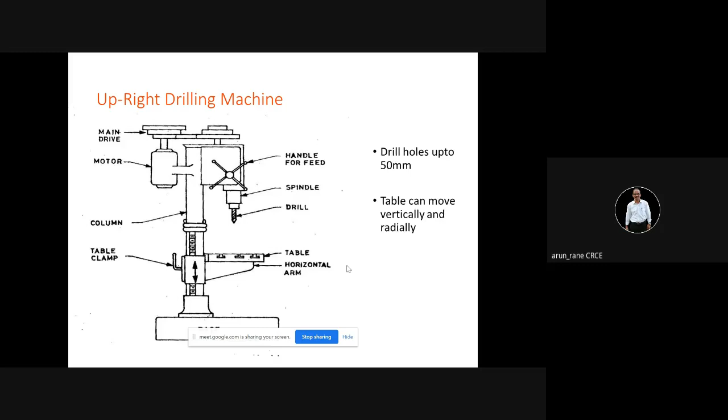Radial drilling. So whatever I am showing, these sketches are easy to draw. You have to practice this; in the examination you have to use these figures.

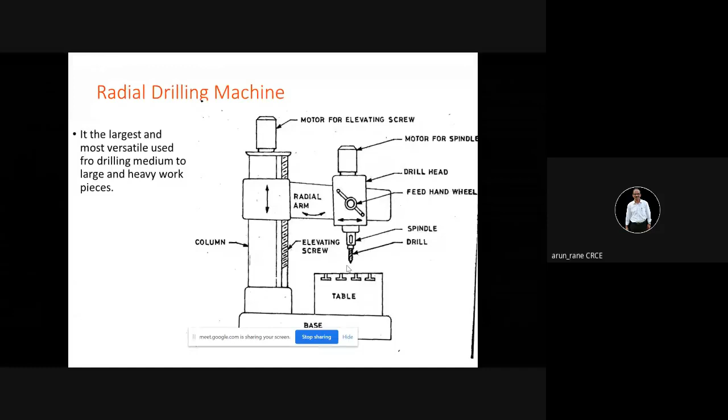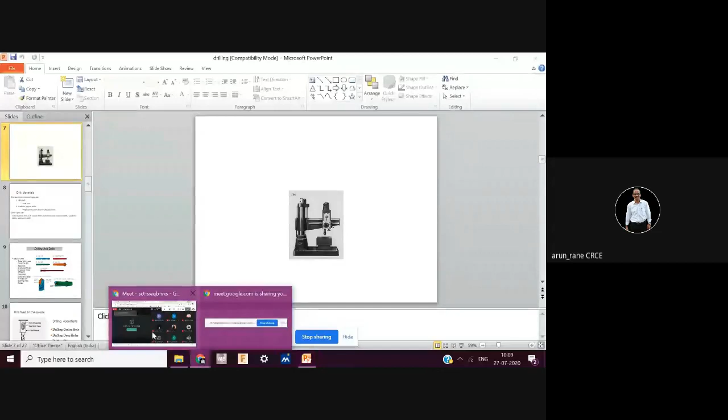More are joining. Hope nobody is waiting. Rutika has joined now. All right.

This is a photograph. This is a round column on which this slides up and down, and these are the guideways on which this head slides.

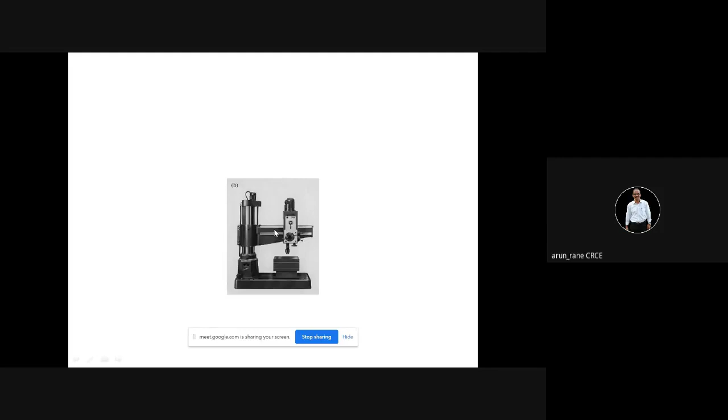Now drill material can be HSS, that is high speed steel, or it can be carbide tip. Carbide tip means the cutting points are coated with carbide, and the rest of the portion is HSS or MS. So this coating is done by PVD or by CVD. These are the methods to use the carbide coating. PVD stands for physical vapor deposition. CVD stands for chemical vapor deposition.

Coating can be of carbide, titanium carbide, tungsten carbide, or coating can be of nitride also. So these coatings offer a very high wear resistance as well as higher cutting speeds and higher cutting feeds, so that production is more with the help of this coated or carbide tip. When I say carbide tip, that means the entire insert is made up of carbide. The tip is made up of carbide.

And when I say coated, that means only a coating of 10 or 20 micron is given on the top, coating of carbide or coating of nitride. So that saves the cost. When it becomes blunt, then again you have to send it for the coating. You cannot do coating in-house, because that is a special technology, carbide and nitride coating. So you have solid carbide drills.

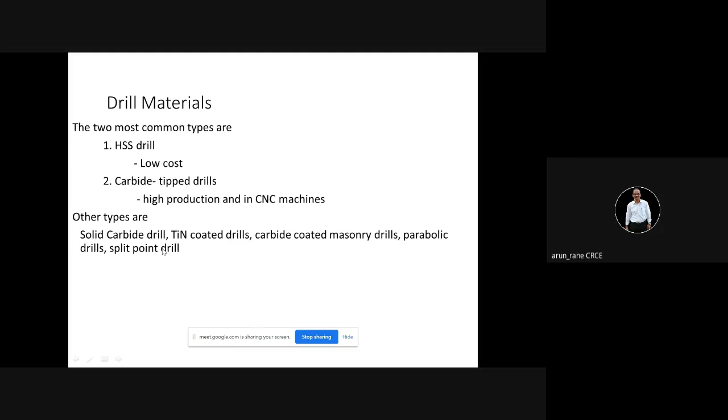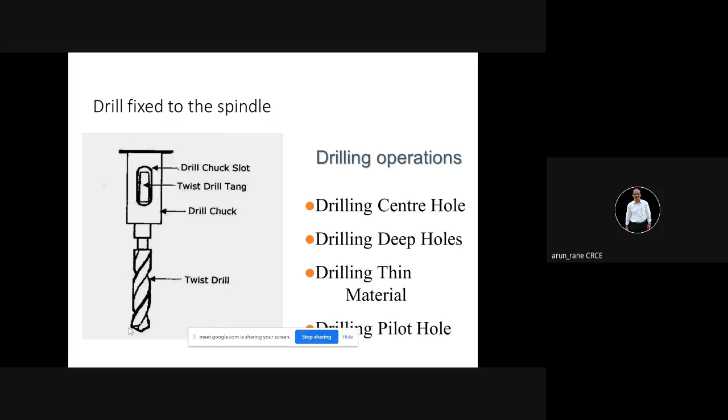Remember, if you are touching by hand, don't touch the drill with naked hands. Your hands will get cut because these are all cutting edges. They are very sharp. Always use gloves. This is the shank. This can be a parallel shank or it can be a taper shank. Generally up to 12 mm you get a parallel shank.

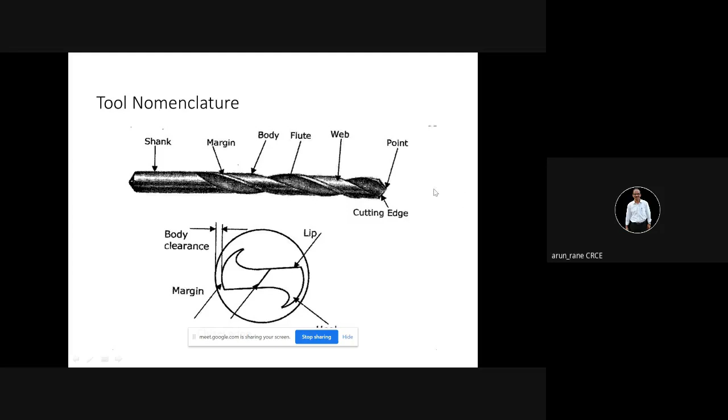Then how to hold? You know that a drill can be held directly in the chuck, or using a socket, or you can use a sleeve also, or directly in the spindle of the machine. If the drills are big, that is generally above 35 mm or above 40 mm, then they can be held directly inside the drilling machine spindle.

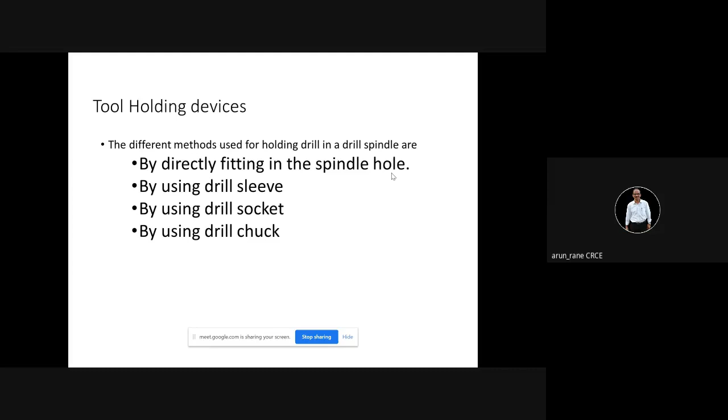So this is your drill chuck in which you can hold the drill. This is the sleeve. This sleeve goes inside this socket, and this socket goes inside the drilling machine spindle. And this is what I was telling you, the use of the drill drift. You have to push this. This has a taper. One side is straight, and the other side has a taper.

So when you push this inside, because of this taper, it will move the drill down. You have to apply just a little pressure so that the drill moves a little down. It doesn't fall down. And then withdraw this drift and simply remove the drill by hand. Again, safety first. So you must use gloves.

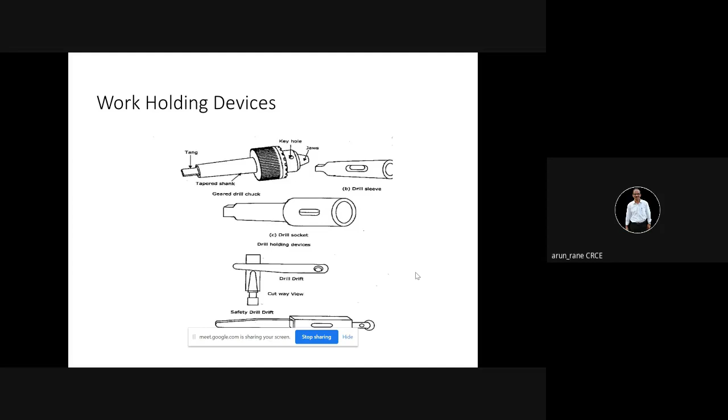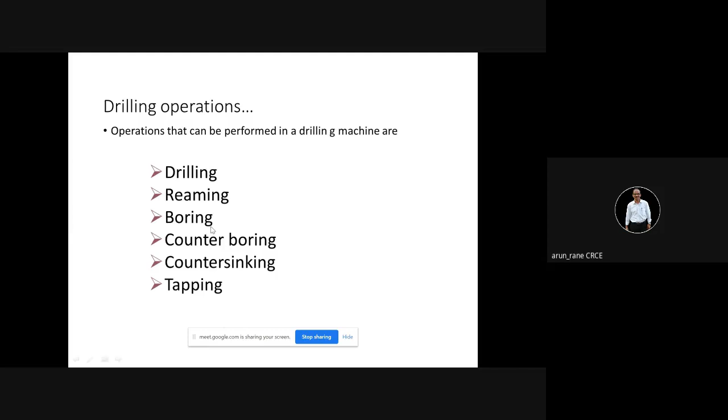These are the different operations, again important from an examination point of view. So you can do drilling, reaming, boring, counter boring, counter sinking, tapping. This figure is important. So as far as possible, try to draw the stages. This is your drilling, and this drilling is called blind drilling. Blind means it is not through and through. So you'll always get a point here.

So if something is going to rest, then you need to make this flat. This is what I was telling when we saw that step drilling operation. Then tapping, after drilling comes tapping. Tapping is nothing but internal threading. So either you can do hand tapping or you can do machine tapping.

Machine tapping is generally preferred when the size is M10 and above, because as the sizes become more and more, the force also increases. So manually it becomes difficult. So that's why we go for machine tapping.

Then this is your counter boring. As I told, this normal drill generates the point. So if you want to have a flat, then you have to go for counter boring. Why do we want flat? So that you can keep a washer or a flat bearing inside this. Otherwise, it will not rest properly.

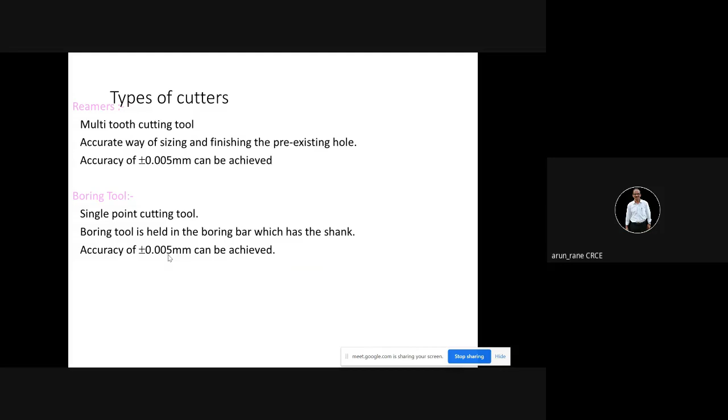Then you have countersink tools. You know the countersink operations, and that can be 60-degree, 82-degree, 90-degree. Standard countersunk cutters are available. Because if you have a countersunk, you can guide the subsequent tools like reamer or taps very easily. Not only this, there is another benefit: most of the times there are countersunk screws. We'll see in CAMD countersunk type of screws available in the market. So the head of the screw is countersunk. It's a taper, conical shape. So for such screws to be accommodated inside the hole, you need to have a countersunk on the hole.

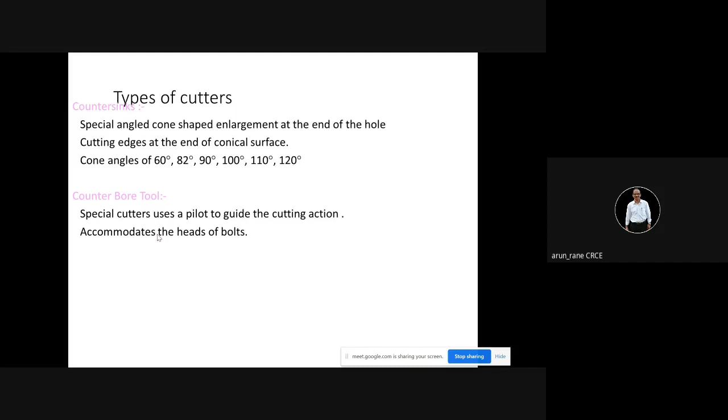Then counter boring is nothing but on the top portion we enlarge the hole. That is what is called the counter bore tool. This is countersink, and this is the counter bore. Spot facing means with the help of the counter boring tool, you are doing some kind of a facing operation here on the top. That is, on some particular spot you are doing facing operation with the help of the counter bore.

If it is a counter bore hole, we do counter boring down, we go down. But when it is spot facing, we just touch upon the face. We just clean up the face. Why? Because suppose the head of a hexagonal bolt is resting on this surface, and if this surface is rough, then the bolt will not sit properly. So you need to clean this surface a little so that the bolt head can sit properly and transmit the full force for which it is designed. If the surface is rough, the bolt will not sit right and the tightening will not be proper.

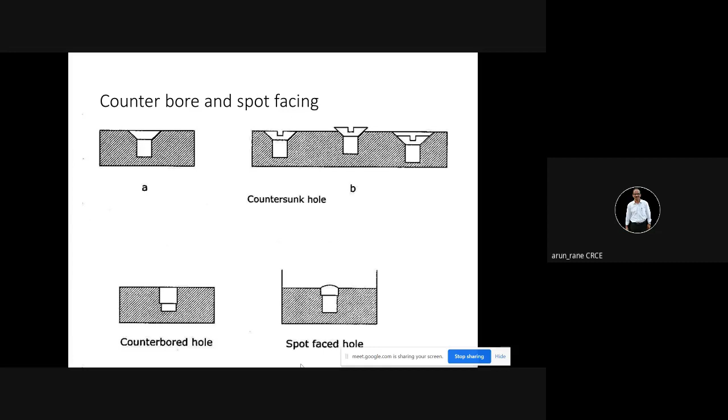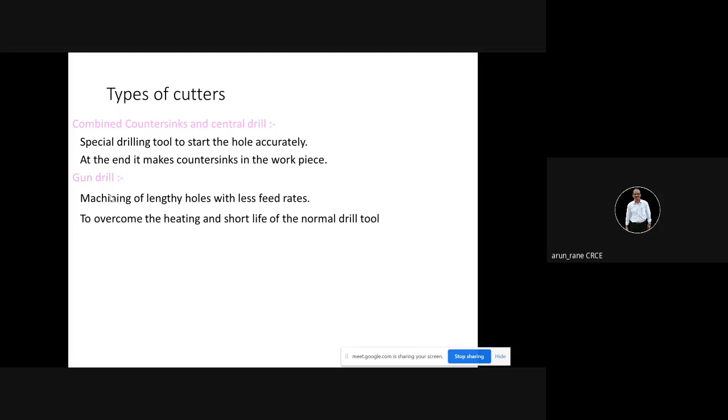You can have combined countersink and center drill, that is doing center drilling as well as countersinking at a time. So this saves time and it gives accuracy also. Only in this case the cutter design becomes a little complex. The cutter should have center drilling features as well as countersinking features. Gun drill, you know by this time, is used for longer holes, and don't worry because it is not there in the syllabus.

Tapping, you must have done. If you are doing manual tapping, then you have to use 3 taps, and if you are doing machine tapping, it's done by 1 tap only. Manual taps come in a set of 3: first tap, second tap, and third tap. How to identify these taps? The first tap will have a larger taper at the start, the second tap will have a little taper, and the third tap will not have any taper. The second tap is also called the intermediate tap, and the third tap is called the finishing tap.

The tap is held inside a device called the tap wrench. It's a kind of handle in which one side is fixed and another is movable. The tap has a square at the top. The tap wrench has a square hole in which the tap goes, and then you tighten with the moving handle, which moves in and out. So with the help of this, you can tighten the tap.

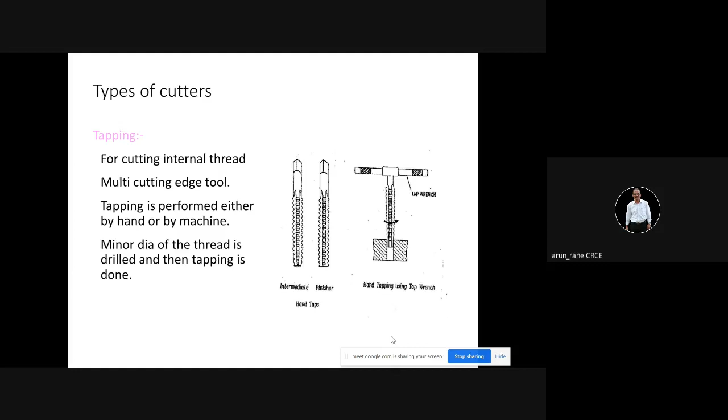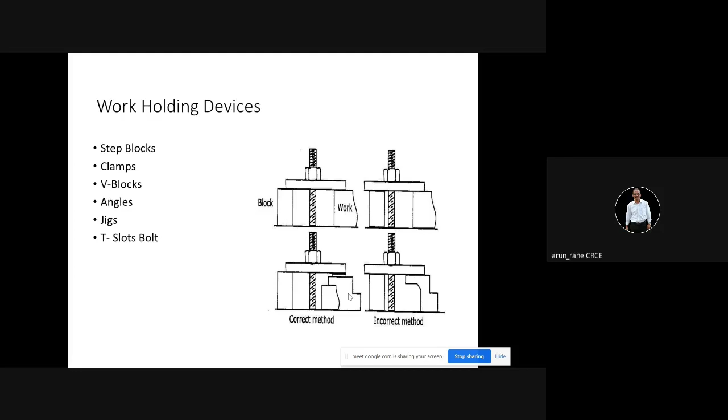So to ensure that this side and this side are at the same plane. Now, V is equal to pi DN upon 1000. This is applicable for any rotating tool. V is equal to pi DN upon 1000. Pi divided by 1000 because V is in meter per minute and diameter is in millimeter generally. So the left hand side is meter per minute, on the right hand side D is in millimeter, so that's why you have to divide by 1000. But the basic formula is V is equal to pi DN.

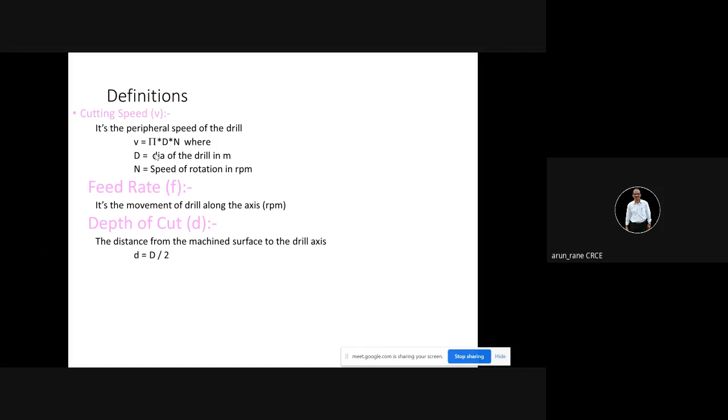How to find out the material removal rate in case of drilling? That is given by this: material removal rate is equal to pi D square upon 4 into feed rate into N, where D is the diameter of the drill, F is feed rate which is given in millimeter per revolution, and N is the revolutions per minute. But normally we don't ask numericals on material removal rate, we only ask numericals on machining time, because that is what is given in the syllabus.

So how to find out the machining time? You know by this time that you must have a total length to be machined. To be machined means to be drilled, to be turned, or to be milled. So you should have that total length, and the total length is in millimeter. Then you divide by feed rate. So L divided by F. Now F is in millimeter per minute. So millimeter divided by millimeter per minute, so you will get minute.

Now in this formula, L upon F into N, here F is in millimeter per revolution. So that's why we have to multiply by N. This is in the denominator, remember. So this is millimeter per revolution and this is revolution per minute. So revolutions cancel and you will get millimeter per minute. So the time will be in minute.

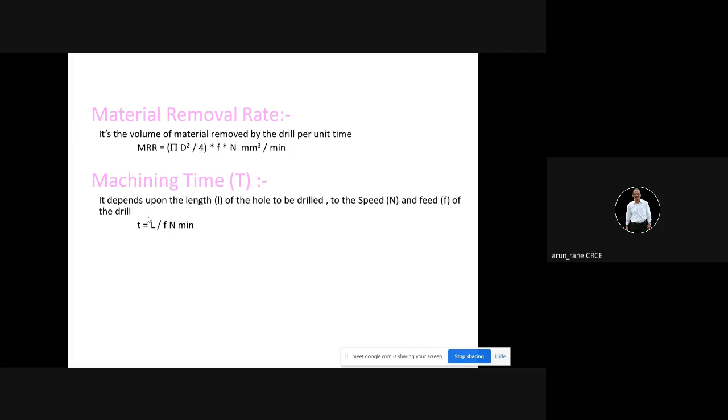Lubrication is important everywhere. With machines, most of the problems or difficulties come because the machines are not being operated properly. We don't know the operations of the machines properly. Almost 95% of the maintenance arises because of improper cleaning, no lubrication, no preventive maintenance done. You have to clean the machines after use. After use means at the end of the shift. Then lubrication is important. Then also greasing.

Use a brush. Don't remove the chips by hand. Chips are hot and sharp, so that will cut your hand. Not only machines, but T-slots, grooves, spindles, sleeves, belts, pulleys should be cleaned. And once at the end of the shift, you have to oil the important parts of the machine, like guideways, which are exposed to the atmosphere, so that they don't get rusted.

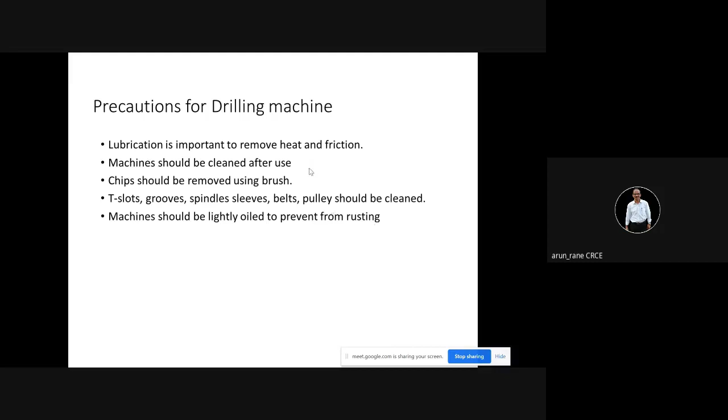If the machine is not in operation for 2 or 3 days or more, then it's better that you apply a thin layer of grease. Otherwise the atmospheric oxygen will react with the surfaces, it will corrode the surfaces, and then the accuracy of the machine will be reduced. So this is a kind of preventive maintenance which is applicable not only for the drilling machine but for other machines also.

Safety precautions. If you are asked what are the safety precautions to be followed, again and again I am telling: do not support the workpiece or tool by hand. There are many people who simply hold a workpiece by hand and do the drilling, too lazy to hold it in a vise. So even if it is a small piece, I suggest you use a vise or proper clamping device, because an accident happens once only. Then use a brush to clean the chips. Don't clean the chips with the help of gloves either.

Don't be overconfident, thinking you've put on gloves so nothing will happen. Chips may cut the gloves also and can damage your hand. When the machine is working, do not do any adjustment. Stop the machine and do the adjustment, that is belt adjustment, belt tension, belt shifting. See that your drill is rotating true, that is straight, before starting the operation. Never place tools on the drilling table. Why? Because the tools can damage the table. Tools can fall down also.

Avoid loose clothing and protect the eyes. Loose clothing because if the clothes or shirts are loose, they may get tangled in the workpiece or rotating parts. Accidents have happened. Not only loose clothing but even loose hair, long hair. Especially girls should take care, so you have to tie your hair properly. This is actually a major concern. There are many accidents because of loose or long hair. Protect the eyes. Why? Because the chips may be small and they may fly off and damage your eyes. So in the safety context, you need to use goggles.

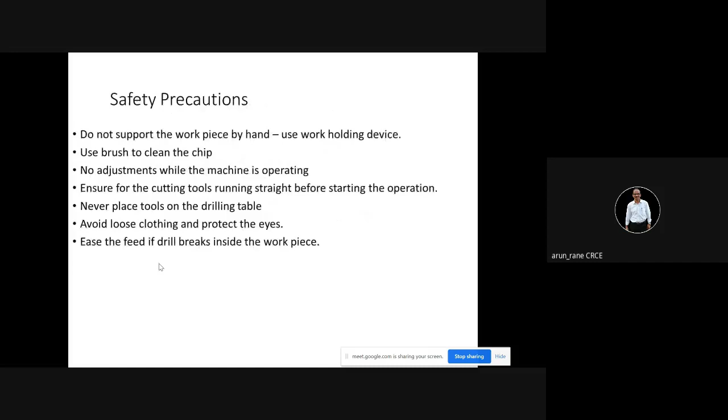So these precautions you have to take. These are the safety precautions. If you have any doubt, you can stop me and ask.

Now we'll go for milling operations. We have completed introduction to the manufacturing process, then some introduction to generating and forming processes. That is module one. Then we have completed the lathe. We completed drilling. Now we'll go for milling, which is again an important operation.

Since these are very important operations, I am giving some more time. I am overshooting the number of hours. Not going exactly as per the hours, but I am going as per the depth of the topic. Lathe being important, milling also being important, I am giving more time because these are the machine tools that you will always come across when you go to the industry.

I'll show you some operations here. What operations can be done on the milling. CNC I will not show you now. I'll show you the Emco milling machine. This is the DRO. This is vertical milling machine.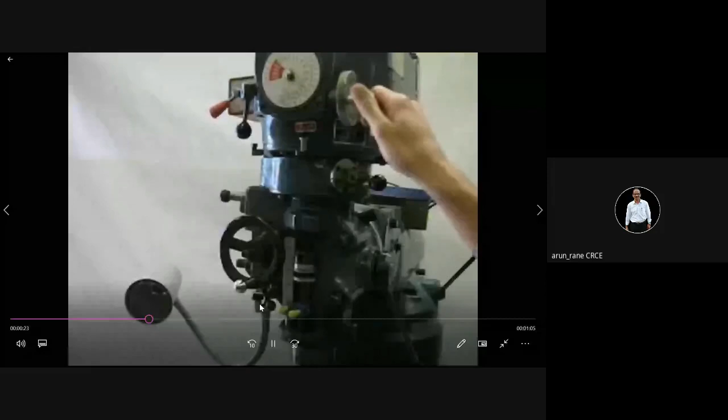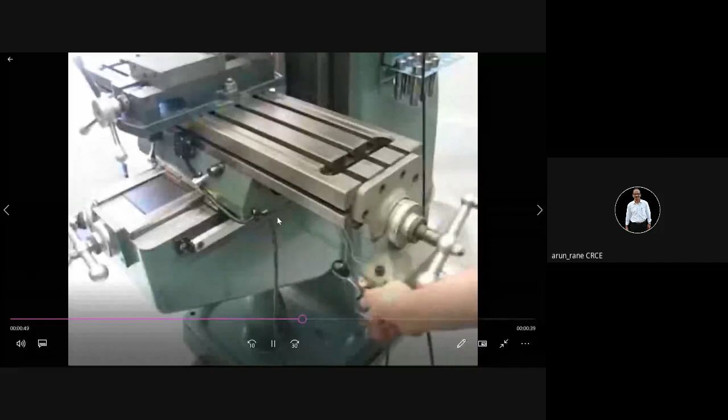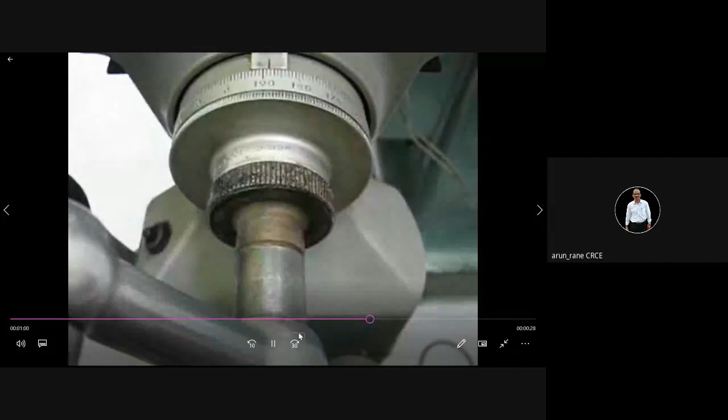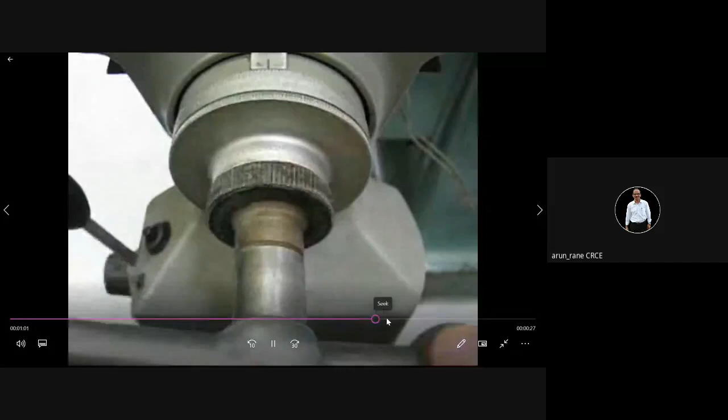This handle is for the table movement. Here he has engaged automatic feed. This is for the rapid feed, that is, the feed is fast. Generally, we call this the x-axis. This is auto feed. This is your y-axis, and vertical is your z-axis. So all the three axes can be moved in auto.

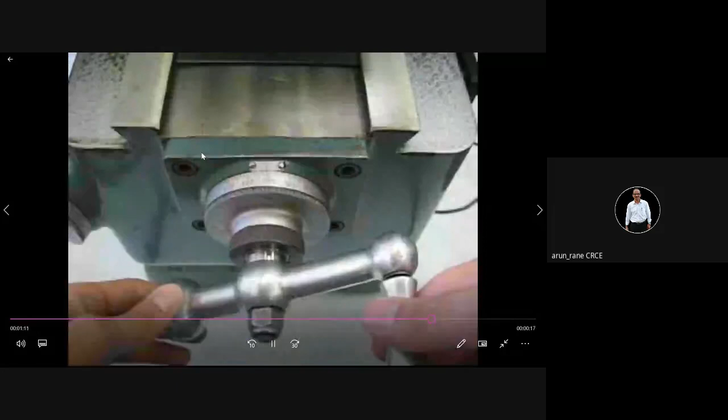These are the guideways on which it slides. This is a dial which gives a reading, and this is a DRO, that is digital readout. This is how the machine will look like. This is up and down vertical milling. This is X, and this is Y. This is a motor for changing the speeds as well as the feeds. This is the column on which these tables are mounted.

There is a provision that this entire knee, this is called the knee, can move up and down on this slide, and there is a screw here. This is the screw on which this knee is mounted, and the knee can be moved up and down. This becomes the Z axis here, and this spindle is for the tool movement. So this is also a Z axis. But whichever is longer, we will take that.

Now, since here the workpiece is moving like this and like this, the workpiece cannot be heavy. You cannot mount heavy workpieces. If the workpieces are heavy, then it has to be a fixed bed type, meaning the workpiece should not move. So generally, these kinds of machines are designed for up to 200 kg of workpiece, not more than 200 kg.

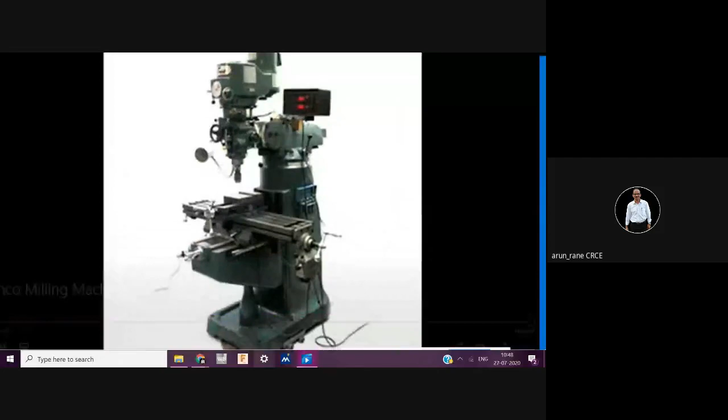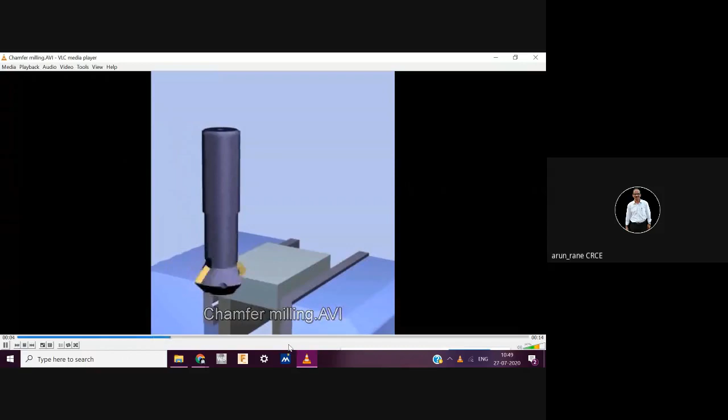What are the different operations that can be carried out? For CNC, I have some good videos that I'll show later. So what are the different operations which can be done on milling? These are all different operations. You can do V milling, V slot milling, slitting on vertical milling, radius milling, and so on. Alright, let us see one by one. This is chamfer milling. This is a vise in which the workpiece is held. What I'm showing is vertical milling operations.

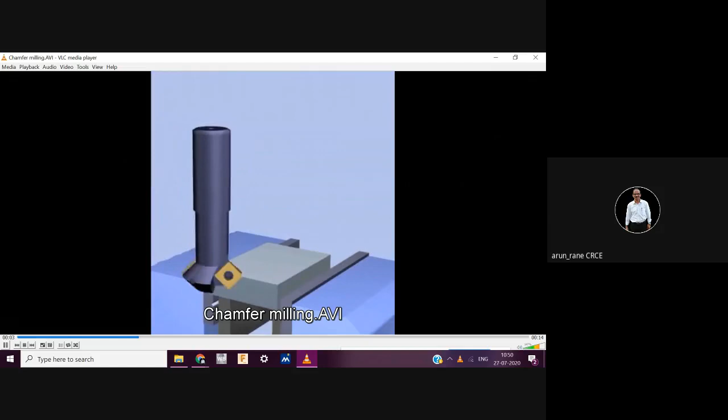This particular operation is chamfer milling, that is milling of the chamfer. Look at the inserts which are at 45 degree. This is what a typical cutter will look like. These are your inserts, and this is a screw which is used for clamping the insert. And this cutter is held in the spindle.

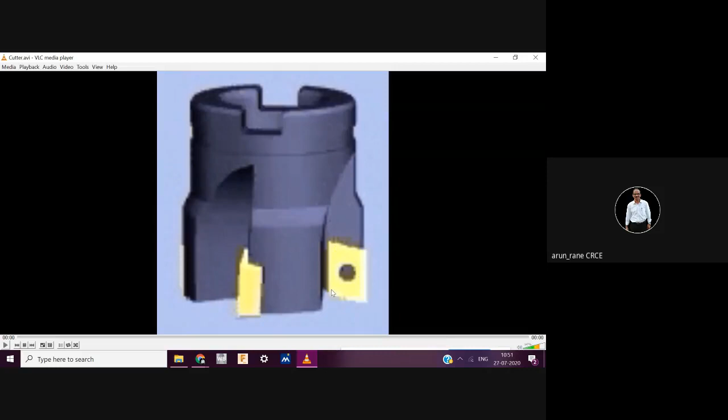Now this insert has 4 cutting edges: one, two, three, four. So if this gets blunt, then you have to index. And if all the 4 cutting edges get blunt, then you have to turn it upside down. So that means one particular square insert can be used almost 8 times.

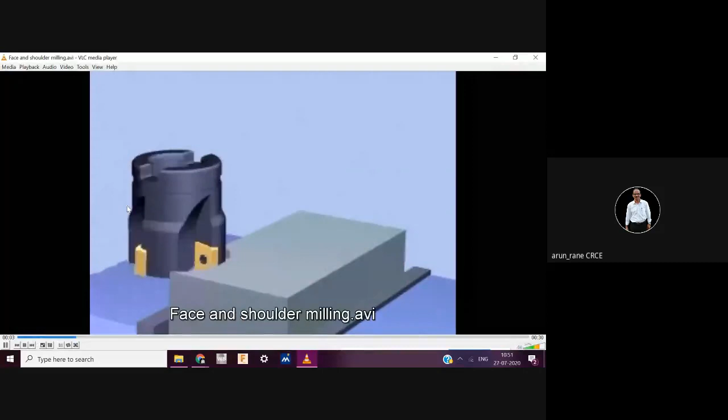So this is called face milling and shoulder milling. The meaning of shoulder is this. This portion is called the shoulder. This is your shoulder, and this is called the face. So face and shoulder milling.

So with the help of this cutter, you can get exact 90 degrees. Look at this cutting edge. See, this is exactly at 90 degree to the horizontal plane. So you get a pakka 90-degree face or a shoulder here. We call this face and shoulder milling, and there are 4 inserts.

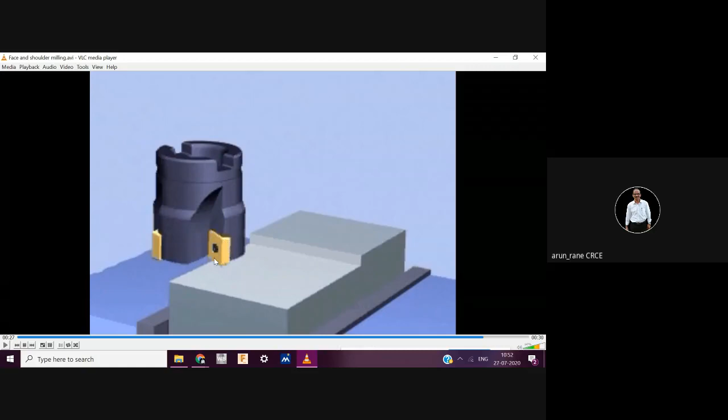So in case of milling, in one of the numericals I told you, the feed rate is given as millimeter per tooth per revolution. So if the feed is 0.1 millimeter per tooth per revolution, and if there are 4 teeth, then total feed rate will be 0.1 into 4, so that will be 0.4 millimeter per revolution.

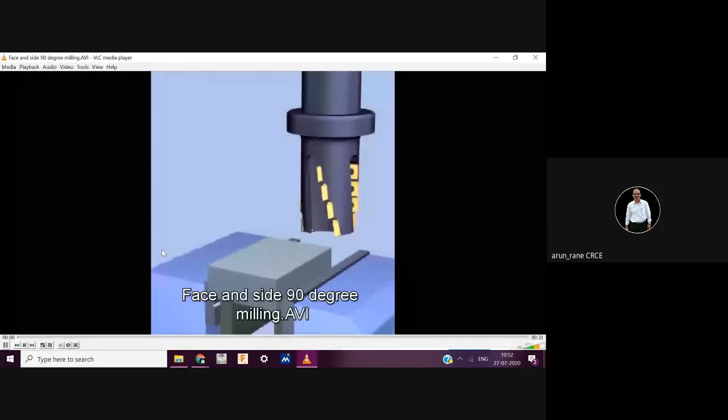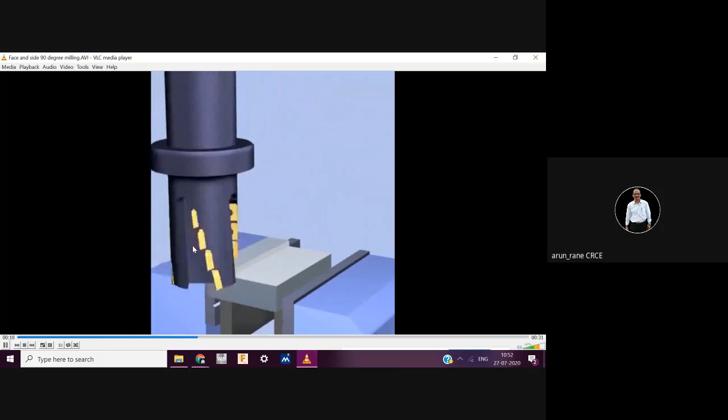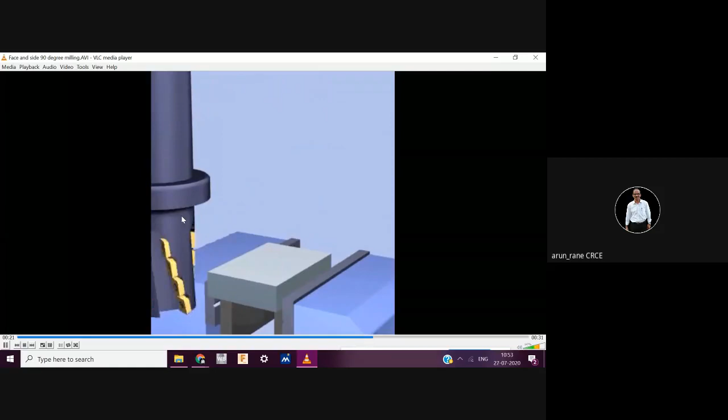Again, this is also face and shoulder milling. This has a longer height, so the shoulder heights can be more. But generally, we don't use it for shoulder, we use it for the face. This also is considered as a face, and this also is considered as a face. Alright.

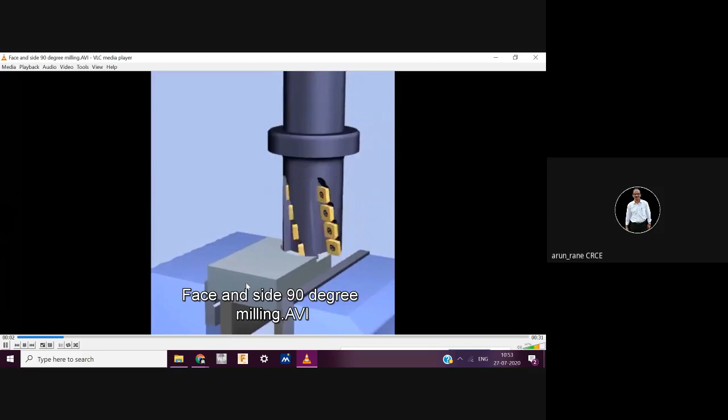So both the faces are milled here at 90 degrees. This cannot be called a shoulder. Shoulder means it's a kind of a step. So this we call only a face. Two faces are milled at 90 degree to each other.

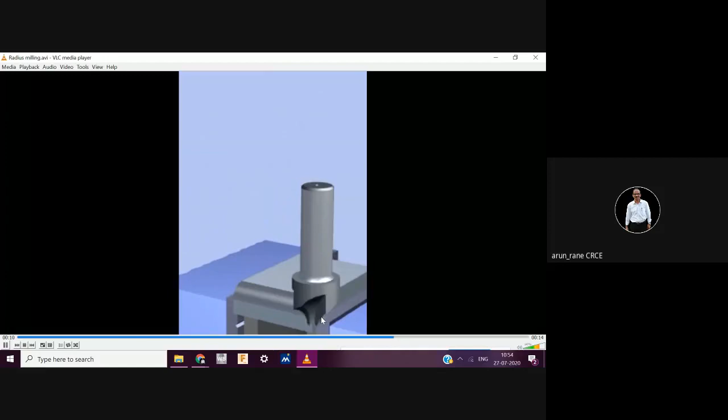This is a forming operation on vertical milling. This is a forming radius cutter. So this is radius milling. This is for the shell end mill. This gives you accurate shoulders. This is slightly rough, so that roughness can be removed.

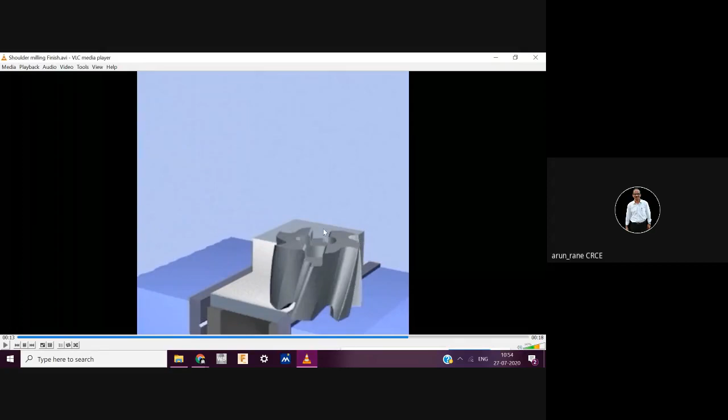So this is your shell end mill, and this has so many cutting edges. How many cutting edges? One, two, three, four, five, and six. There are six cutting edges. So that's why milling cutters are always called multi-tooth or multiple point cutting tools, because there are more than one. And this particular cutter is called the shell end mill. Shell, S-H-E-L-L, shell end mill.

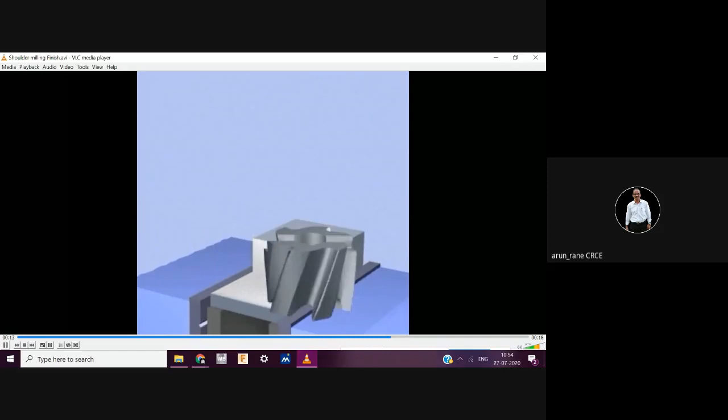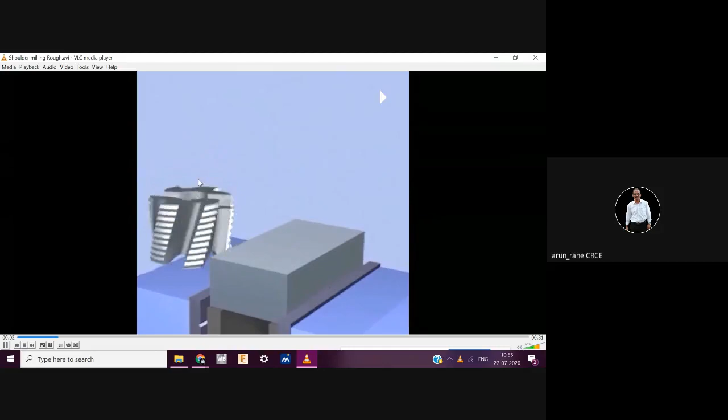So that was the finishing operation. You have shoulder milling, rough operation. So this is for the staggered type end mill cutter. This is used for rough milling. Again, a multiple point cutting tool used for rough milling. There are higher material removal rates and it will always give a rough surface.

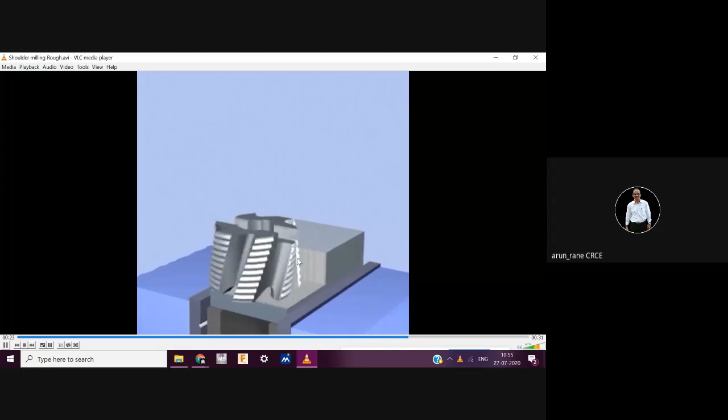It will always give a rough surface, and we just now saw how to finish it with the help of the shell end mill. So this will always be followed by a finishing operation.

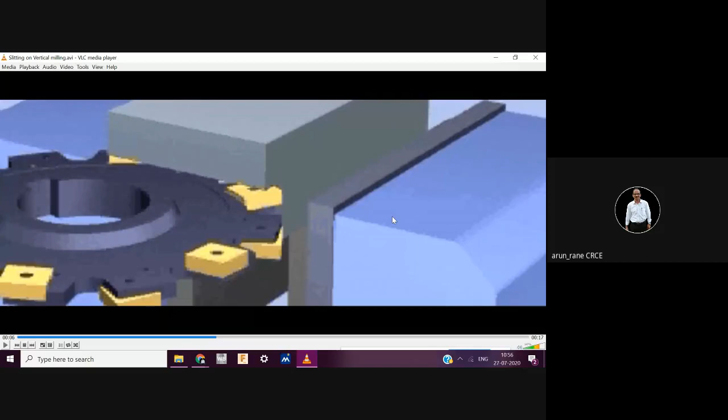And this is the bore. It is mounted on the spindle. So obviously this spindle will be a vertical spindle. So this is the vertical milling operation, slitting operation, vertical milling. So you see that the cutter doesn't clash.

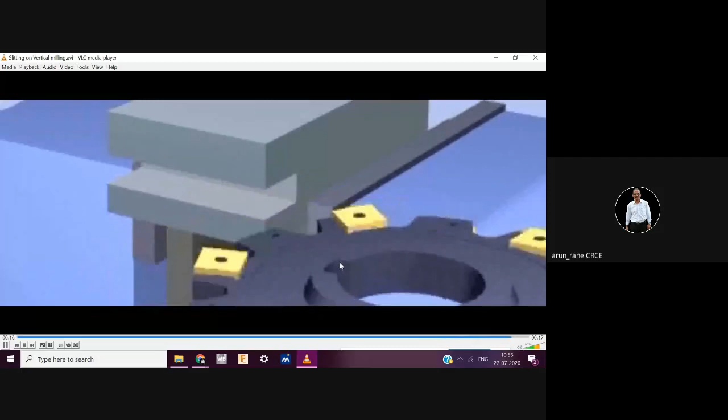One more slitting, that is on the horizontal. Now see, here this is the bore. So obviously this cutter is mounted on a spindle which is going like this, and definitely this spindle will be horizontal. And this is the key way. So you have a slot on the spindle or on the shaft. The purpose of the key is that this cutter will rotate with the spindle.

If there is no keyway, then there are chances that this cutter will rotate freely on the spindle. Means if the spindle is rotating at 1000 rpm, since this is free, there is no key, it may not rotate or it may rotate. So that's why we have to fit a key.

And you cannot fit this cutter very tightly on the spindle. Why? Because every now and then you have to change the cutter, isn't it? You cannot have only one cutter on that machine lifelong. Every 5 minutes, every 10 minutes, you are going on changing the cutter. So you have to have a key, and this bore should go freely on the shaft.

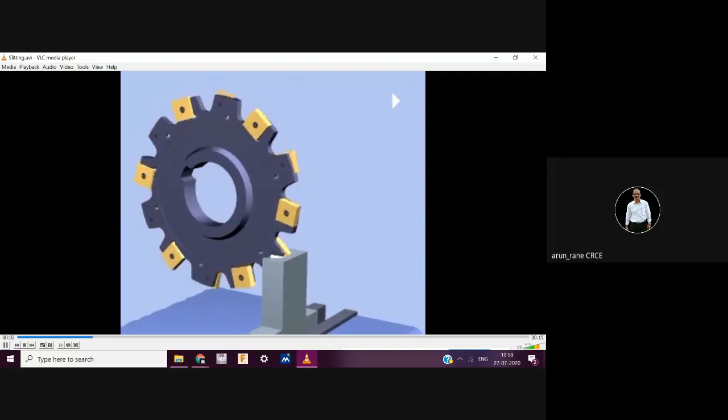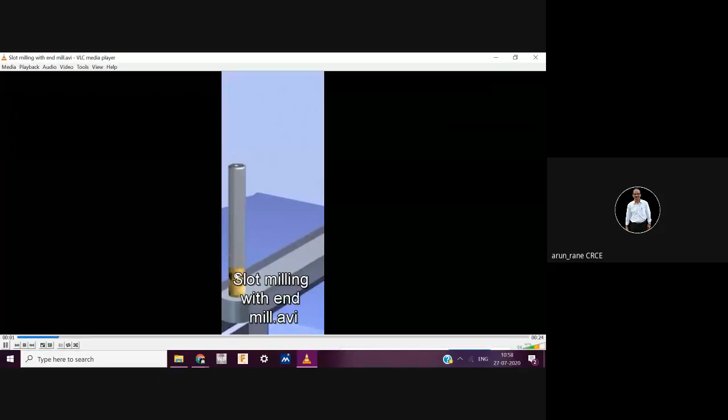Yellow color, that is the inserts. We call it golden coated in the layman's language. Then you have slot milling operation. See, this is now coated. This is a coated cutter. This is the slotting. This is cutting of the slot. You can go only till here. You can see these flutes. It looks like a drill, but it is not a drill. This is called the slot cutter, or we call the slot end mill. Slot cutter or slot end mills.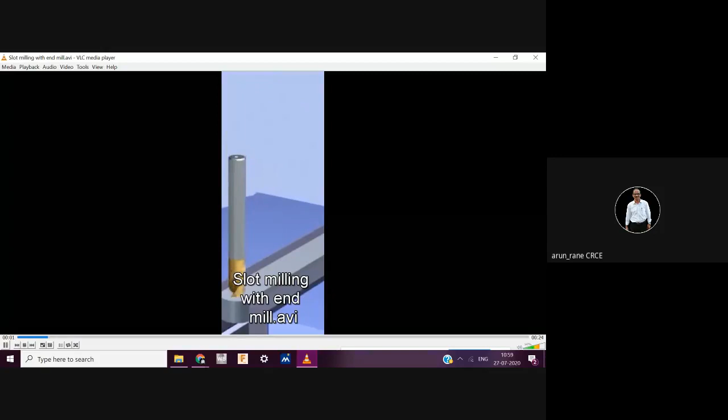I'll show this again. This is important. This can be asked for the numerical. That is, if the slot length is this much, and this is for the number of passes. You know, one pass. This is the second pass, or depth of cut, and this is the third pass. So in three passes, it is finished.

This has two cutting edges. This, right, see, two cutting edges, one and another. These are flutes, but this is not a drill. This is end mill. End milling is a regular operation, you know, on vertical milling machine.

So the purpose of the coating is, this is coated. The purpose of the coating is you can use low cost material as a shank, and then you go for a coating which is expensive. So you don't have to go for solid carbide tool. No need for going for solid carbide tool. You can go only for HSS or steel material, and then just do the coating. So that comes as an economical option, and you also get a good material removal rate also.

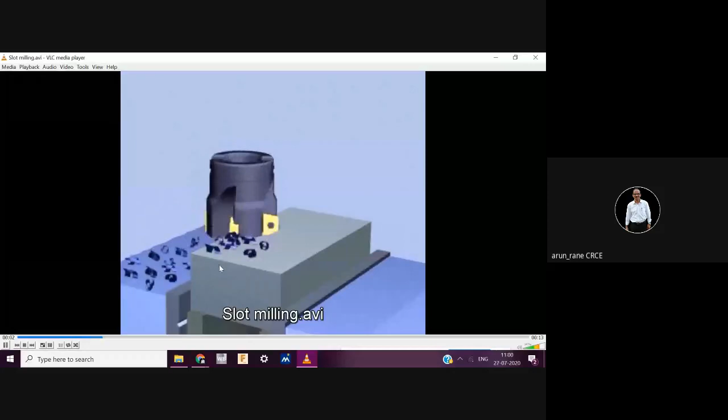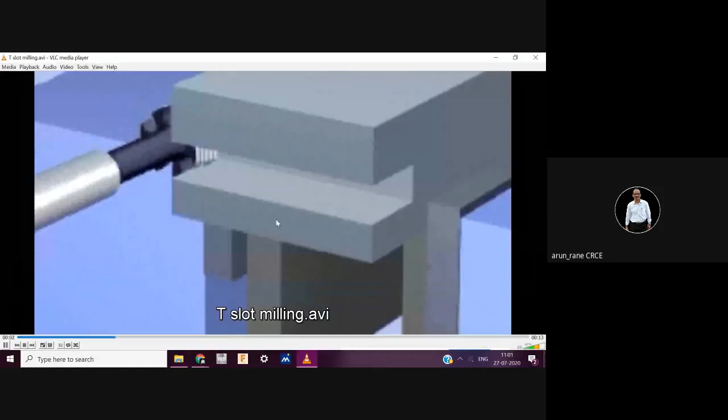Again, this is the slot cutting. This is what your slot is. So we call this operation as face as well as shoulder milling. Then you have T slot milling. T slot. Again, you have to see that the cutter clears off the vise. See now it has cut. This is a T. Initially you have a slot. Now this is a T slot milling cutter. This is a spindle, and obviously this is your horizontal milling machine. So why the T slot milling machine?

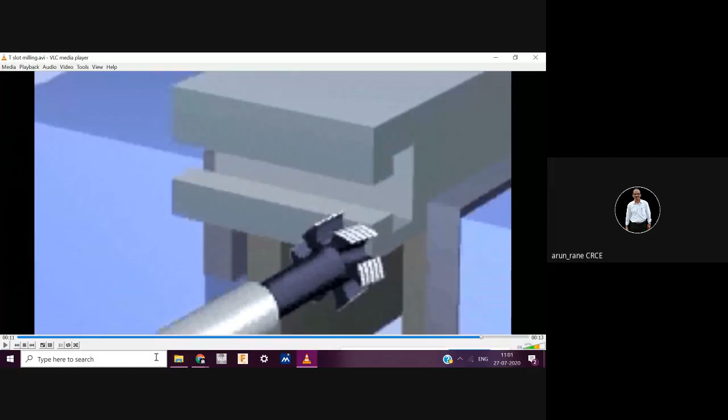Again, I will show this. This is a horizontal spindle milling machine. The operation being carried out is T slot milling.

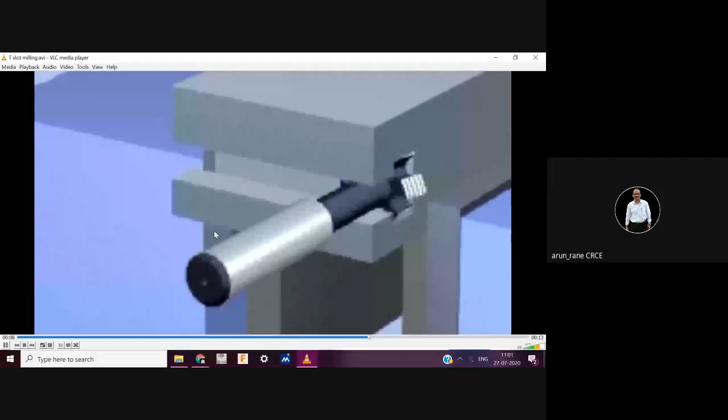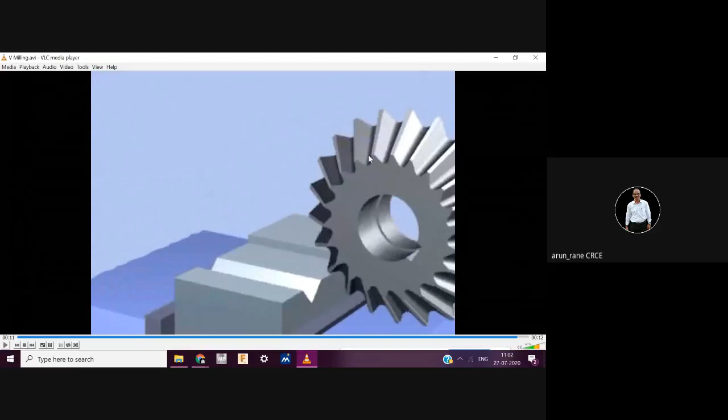You have one more operation, that is V type milling. So you can have 90-degree, you can have 120-degree V. This is also called the form milling operation. Form milling. So the cutter is formed as per this degree. So that's why it is called the form milling operation. Show it again. Again, this is held on a horizontal milling machine with the help of the key. So these are the different milling operations.

Then there are some videos. There's a lot to show, but the problem is duration, the timing. Time is very less.

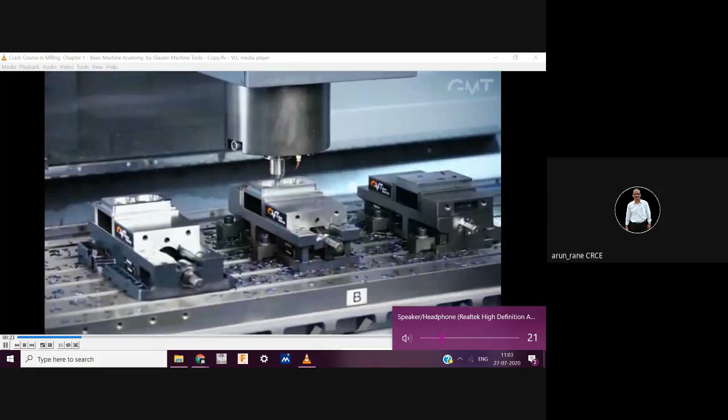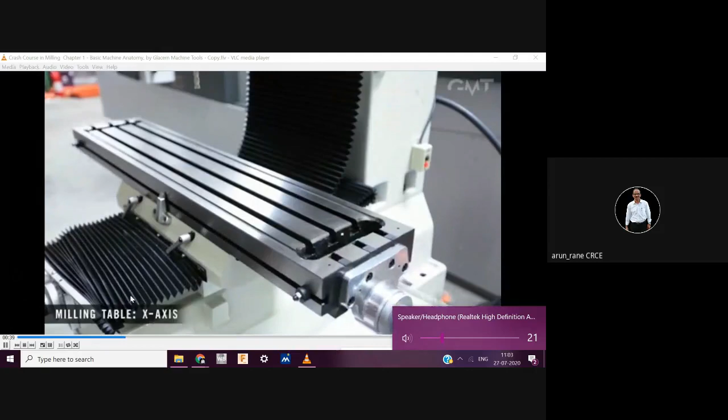GMT is famous for milling machines. This is what a typical milling machine will look like. These are the number of workpieces which are mounted. X, Y, and Z. So these are the bellows. These bellows protect the machine. The chips don't go inside. These are rubber bellows, so they can be compressed easily. This is now the x-axis, which is moving manually. This is the z-axis. This is what your spindle is.

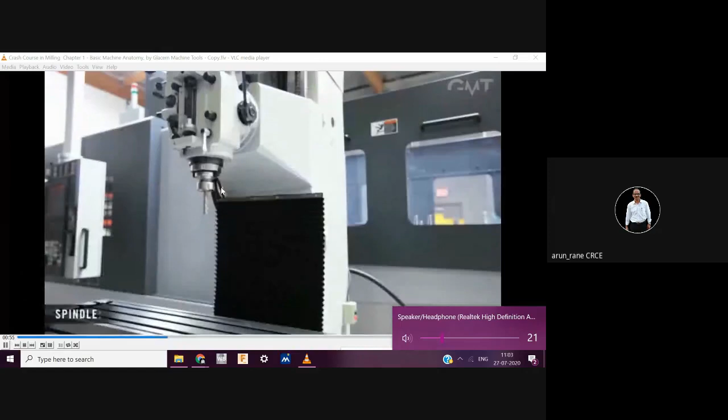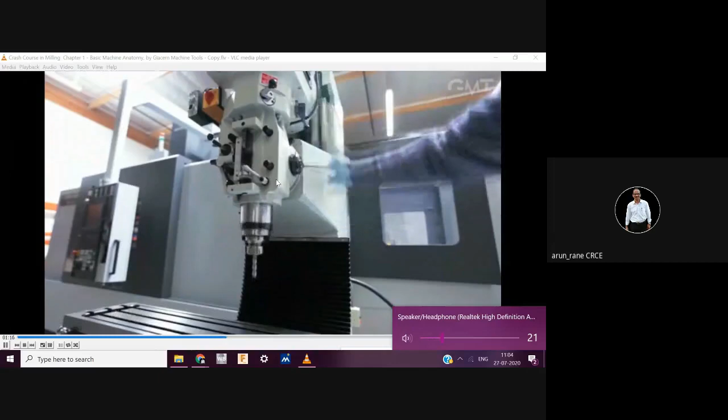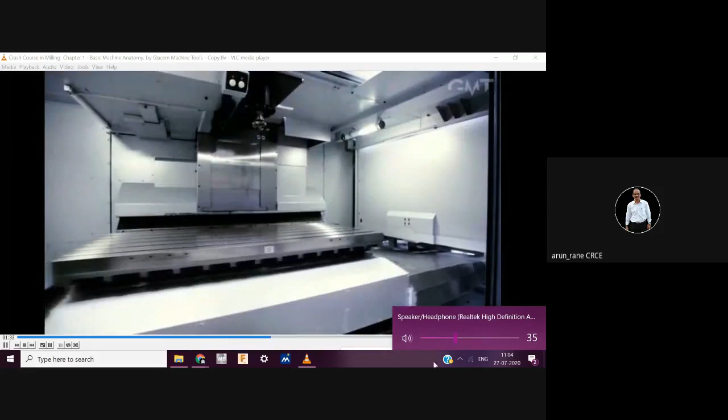This is spindle or quill. Spindle or quill. Not to be confused with the z-axis. This is a CNC. This is what your tool changer is. Just now what you saw, that was a tool changer. These are the telescopic covers. Sheet metal telescopic covers. The chips will not go inside. These are the guideways. And this is what your ball screw is.